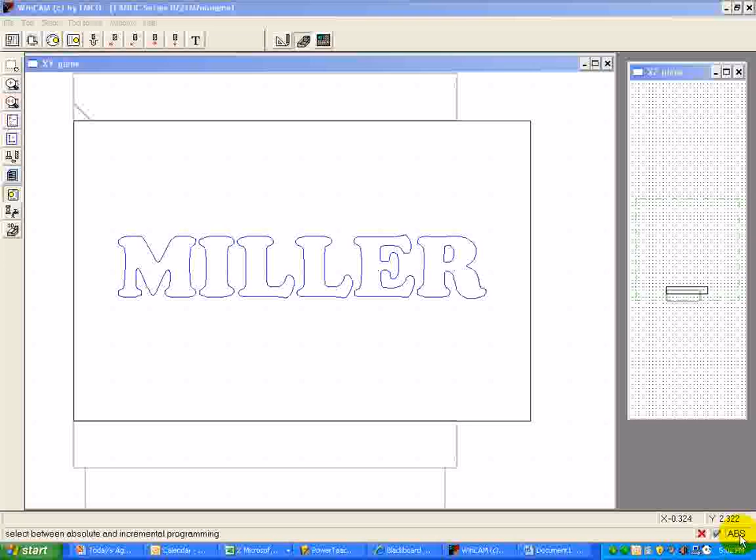Alright, here is my demonstration on how we actually set up the CAM portion for the text. And it's very similar to other programs that you're going to do, but it's actually pretty simple. So what we're going to do is make sure that we have the CAM screen up.

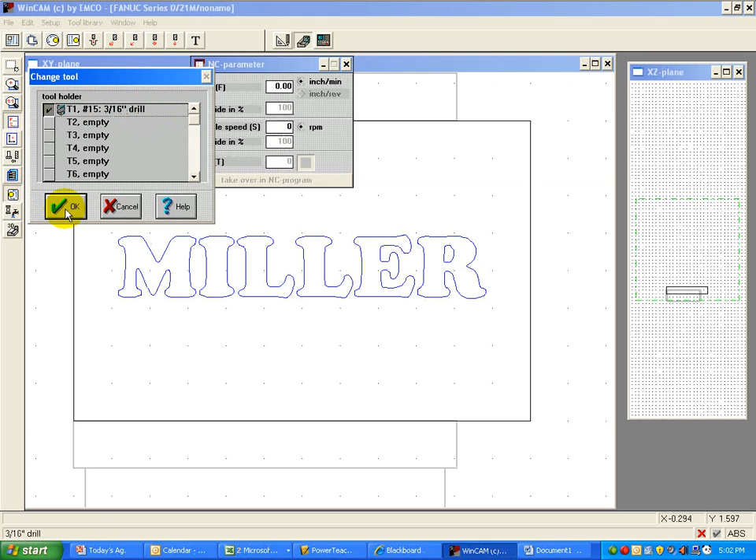Now we're actually going to make sure we call up that tool, and for this example I have a 3/16 drill. Again, you want to check with your instructor if it's an end mill or whatever size it is. You need to make sure you get that right, of course, and it matches what's loaded up in the machine. Now we're going to click OK, and I'm going to do a rapid move here, and I always like to rapid move it up above my piece over here in the XZ plane.

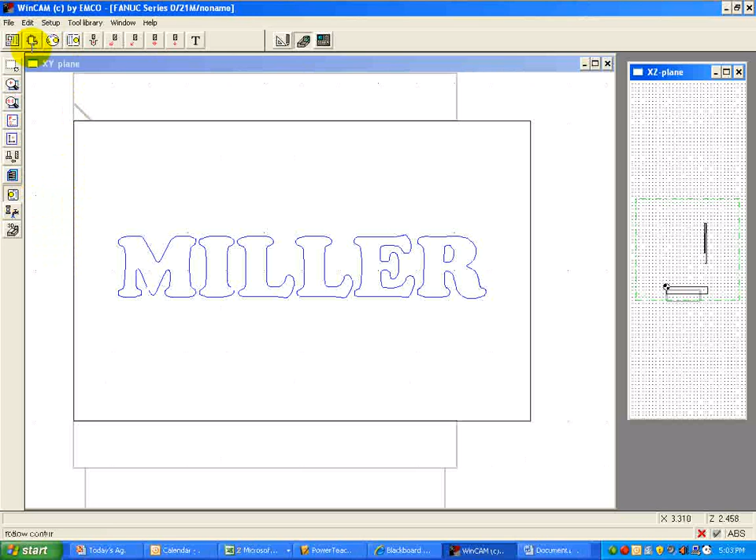And then we are going to click on the roughing section, and I'm going to click on text. Oh, I first have to switch on the spindle. Forgot about that part. Click on the periphery. Go ahead and switch on the spindle. Now I'm ready to do my milling. I'm going to do my text milling or engraving. I'm going to click that.

I'm going to click on the actual text on the outline, and then I'm going to come over here to the checkbox. Now, here's what you want to do. This has already been set for me at negative 0.0625. That is, if you look at your equivalency chart, 1/16 of an inch deep. Now, I found that that's a pretty good depth for text milling, 1/16 of an inch. So you don't really want to go deeper than that unless you really want to on your design, but I found 1/16 of an inch works pretty well.

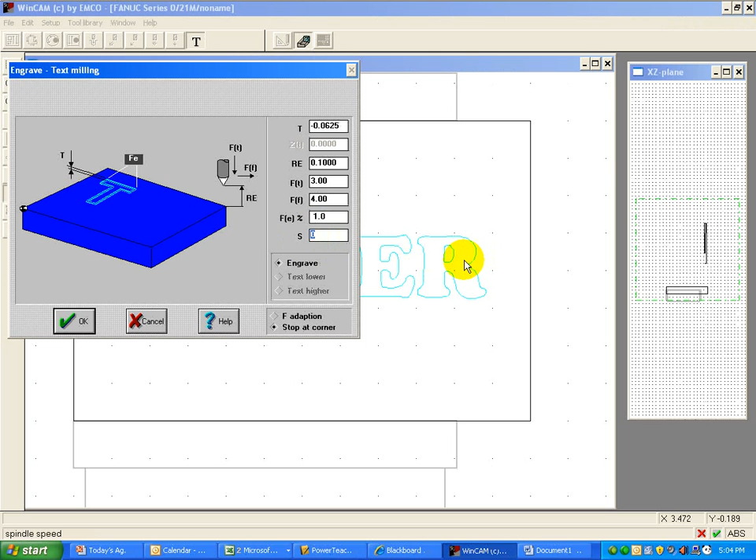All right, your return, so how far it's going to come up, I set that to 0.1. 3 inches per minute, that's the feed rate down. 4 inches per minute is pretty good for most of our milling. This part right here, you can just leave it as 1.0 for our purposes here, and then the spindle speed depends upon your actual type of material. For the hard white plastic, the high density plastic, I found that 1700 or 1800 works pretty well. We'll set it at 1700.

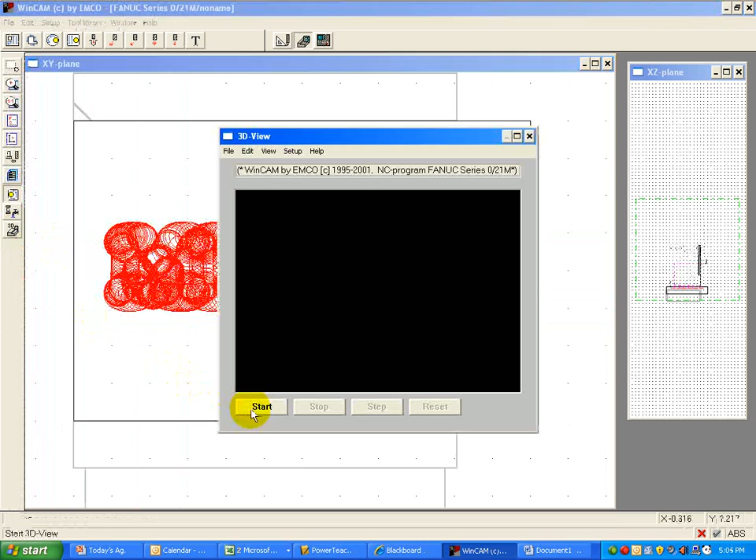Usually the harder the material, the slower you want to go, but that again depends on the type of material it is and what its properties are. So I'm going to go ahead and click OK. And you can see, there it goes. Okay, now if I click on the 3D, let's see if we can pick this up on this. We're pretty far out there.

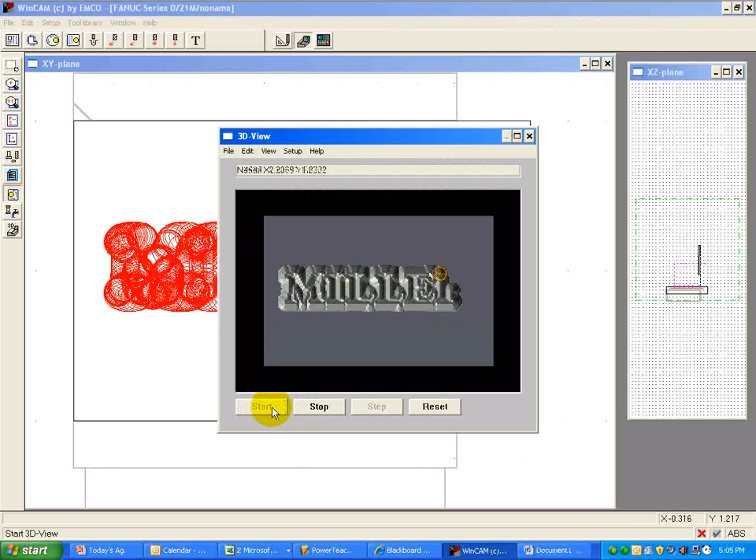I'll click on stop. I'm going to reset, and I'm going to go to setup view. I'm going to look straight down on it, and I'm going to go to setup display, and I do not want to see the clamping device. And I want this to be solid. Okay, let's see what we can do with that. There it is. That looks pretty darn cool.

Now, if I were to change the view, I can look at it at more of an angle. Click this one. And if you notice, it's got kind of a little cavern look to it, I call it. That's because of the fact that it's an actual drill bit that's milling this out.

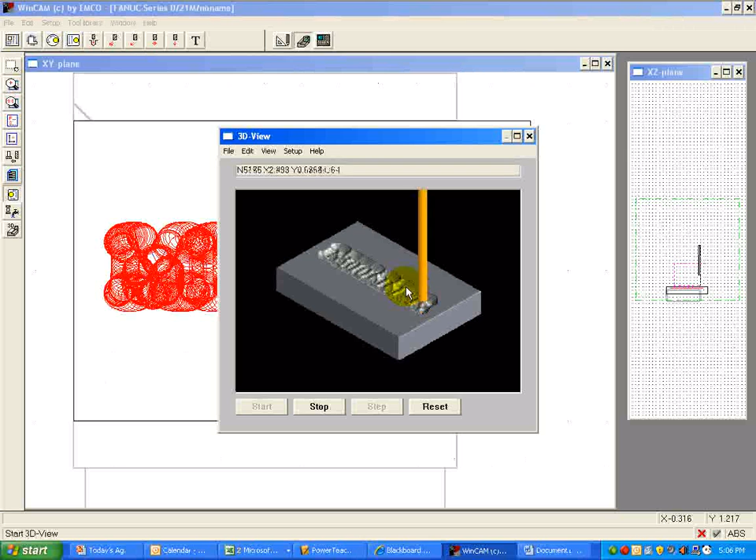So there you have it. That is how you set up the CAM program for the text. And of course, you want to check with your instructor before you do any milling to make sure that your machine is set up correctly with the right end mill or bit, whichever we're going to use. And you can see the possibilities are very, very infinite when it comes to milling this.